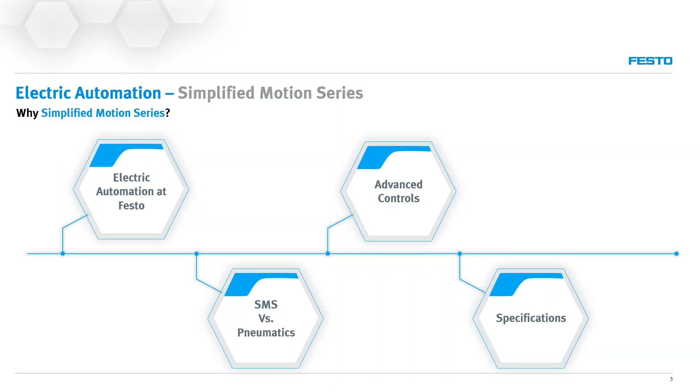Great stuff. I hope you guys got the gist of what we'll be looking at today, referred to as Simplified Motion Series. Now, before we continue with Simplified Motion Series, I'd like to kick off with a poll. Do you have problematic air at your workplace? So if you've got water in the lines, or perhaps inconsistent cylinders running because of fluctuating air pressures, please just answer the poll quickly with a simple yes or no. As soon as we're done there, we'll continue with the presentation.

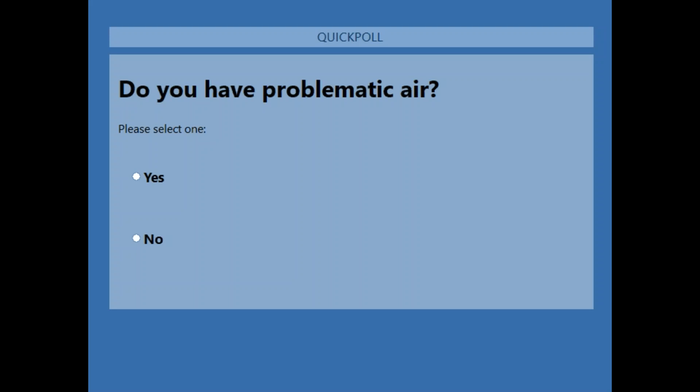Great. So guys, I believe you can see my screen again. And as you know, in electric automation at Festo, we've got quite a wide range of products in our portfolio. So where does Simplified Motion Series come into play?

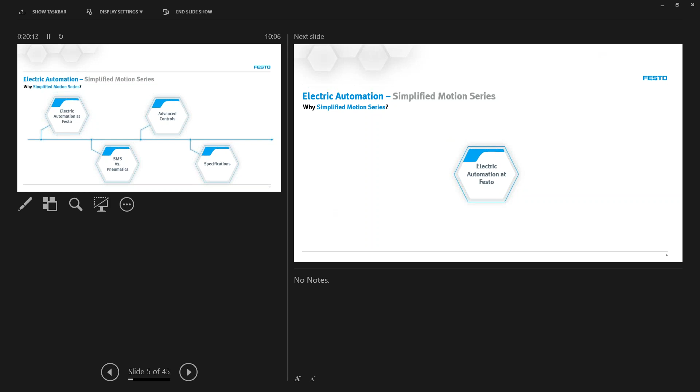So as you'll see with Simplified Motion Series, it really comes in at the bottom end.

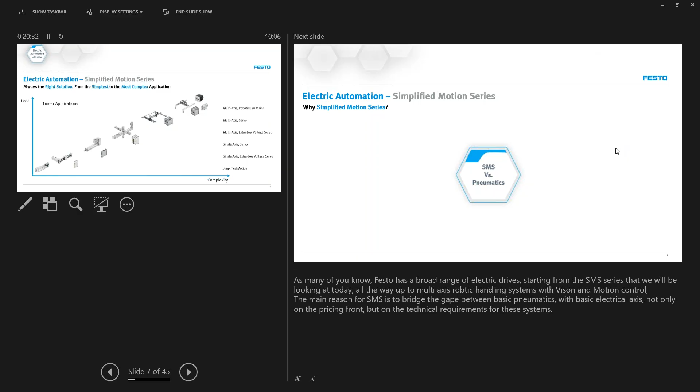Excuse me, Mark, it's just in presenter mode. Do apologize, I don't know why it's done that now. Thank you, Kirsha. As you see, the GoToWebinar is still a bit new to us, and if you click a bit on the wrong place, you tend to see wrong things. All right, guys, so I believe we can now see the full screen again. So

100%. All right, so as you can see in the bottom left-hand side, Simplified Motion Series is where we start, and it is the lower end of the cost versus complexity chain. And as you can see, we also progress up from single axis, be it extra low voltage servo, full servo axes, all the way up to the top where you have the multi-axis systems alongside motion controllers and of course our vision systems. But today we'll be focusing on Simplified Motion Series and what it brings.

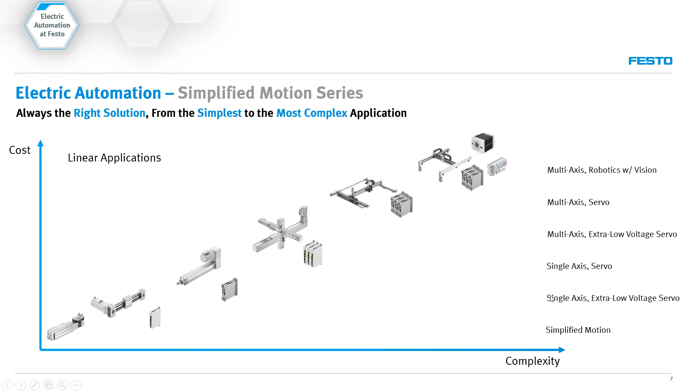So where does Simplified Motion Series fit in? We believe it actually is the bridge between standard pneumatics and electrical axes. So with that, let's have a quick squiz at how we compare the Simplified Motion Series to the pneumatics. So as you'll see in the bottom left-hand side is our Simplified Motion Series. And hopefully you'll notice that it is a mechanical axis, similar to that of a pneumatic cylinder, integrated with a decentralized, already attached stepper controller.

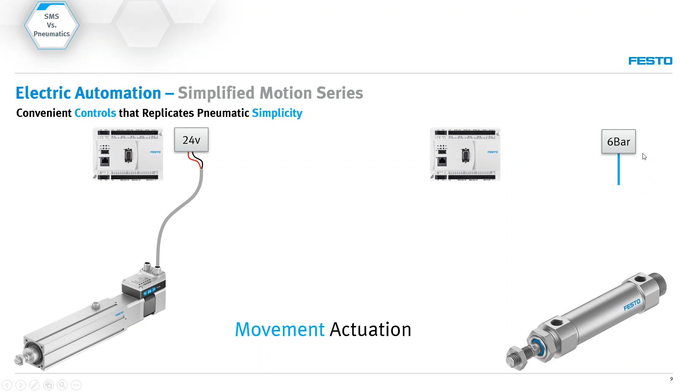So in today's day and age, to get motion or actuation, we need to look at how simplified motion or even pneumatics start in terms of actuation. So we both need some form of supply, be it electrical supply for the Simplified Motion Series being 24 volt, or if you compare pneumatics, you would of course require 6-bar pneumatic pressure. How do you then get movement? So movement is quite simple. You attach your inputs directly to the PLC, and you will then be able to move your Simplified Motion Series either forward or backwards, so extending or retracting.

How would we do that with a pneumatic cylinder? Quite simple. We add in a valve, and for today's exercise we're going to be using a 5/3-way center closed. And the reason we're using a 5/3 center closed is so that we can try and stop a pneumatic cylinder halfway. So we've got our 5/3 valve. Now we need to connect from the PLC exactly the same two outputs to the valve to switch to go positive or negative. So you guys will see that the outputs from the PLC are the exact same between the pneumatic and the electric option. So from the valve, we of course have to pipe up to our cylinder, and we'll now be able to have motion.

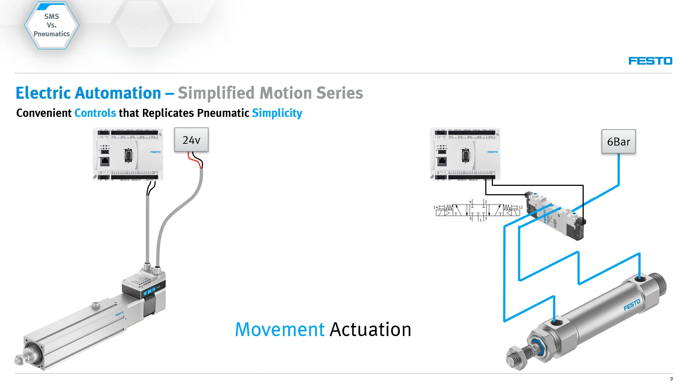So what do we need to do with that motion? We need to be able to control the speed. So for those of you that have worked with pneumatic systems, how do we control the speed? Quite simple. We just add in a couple of flow controls, and we can now adjust the speed by regulating the exhaust on those cylinders. So a question might come up: how do we then control the speed on a Simplified Motion Series? Quite simple. With the HMI on board, you'll see that we've got two speed settings, one for speed out and one for speed in, meaning the extending speed or the retracting speed.

Okay, so what else can we set on a pneumatic cylinder? Of course, we can set the force. And how would we set the force? By adding in a pressure regulator.

Sorry about that, throat getting a bit dry this morning.

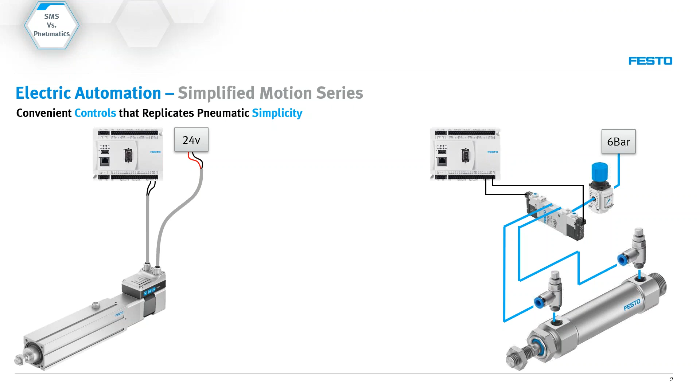All right, so by adjusting the pressure to the valves and to the pneumatic cylinder, we can control the actual force that the cylinder is applying. So once again, on Simplified Motion Series, we can adjust the force on the actual HMI. Then what else do we need? We need to be able to know or interlock whether the cylinder is retracted or extended. So by adding reed switches or limit switches onto your pneumatic cylinder, the PLC will be able to know where the cylinder is. In exactly the same way, we can pick up whether your Simplified Motion Series cylinder is extended or retracted, because of the encoder included in the stepper motor, we know the actual position. So we negate the need for additional sensors.

So that's two things that it'll actually assist the customer with. One, it reduces the purchase cost because you don't have to buy external sensors. And of course, you get rid of those niggly fingers, 11 o'clock, 12 o'clock at night, where machine operators move sensors so that the machine can stop operating.

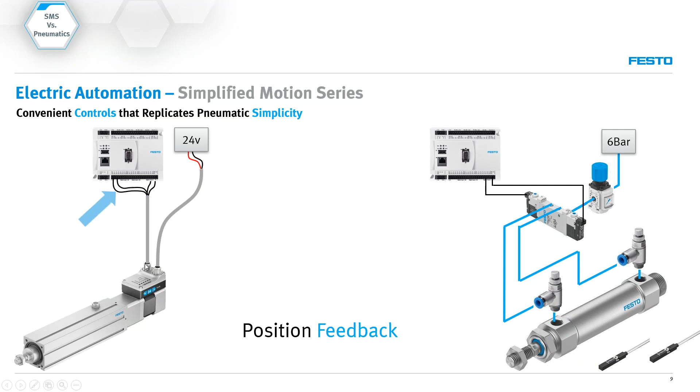So as you see, the sensors are wired directly into the PLC and are included in the same cable. For those of you that might have noticed, there are only two cables that get wired to the Simplified Motion Series, one being your source or your 24-volt supply, and the other plug gets wired with regards to your signals as well as your IO-Link. IO-Link has its benefits, and I'll touch on IO-Link a little later in this presentation so that we can see exactly where the benefits of the IO-Link system are.

So how do we control this? Digitally, it's controlled via two inputs. And we get the position feedback via the signals from the Simplified Motion Series. Further than that, there's no configuration or tuning needed.

Cassandra will be popping up a poll just to find out, do you have technical or qualified maintenance technicians on site, or do you make use of external contractors? So guys, if you can just give us a yes or no there, do you have qualified maintenance technicians on site? As soon as we're done with that, I'll answer as to why that's important with the Simplified Motion Series.

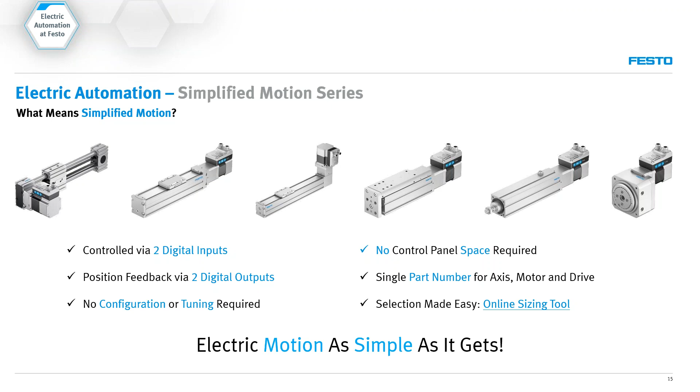So as you can see, it's electric motion, as simple as it gets. But let's compare again between electric axis and pneumatic axis. What is needed and what are the benefits that we get?

So of course, electrical axis, because of the closed loop control, we get repeatability, we get accuracy of about 0.1 millimeters, where with a pneumatic cylinder, your speed as well as your force and pressures all vary because of temperature and loading, as well as load on the compressor system. So if you want accuracy and repeatability, electric axis is the way to go.

We also look at installation. You see on the Simplified Motion Series, you only need one component, where on the pneumatic, you need 7 odd components. So as I mentioned, from your store having to order, as well as just keeping critical spares in stock, you can use one system.

Imagine OEM here has 3 of the same cylinders, one being 100 millimeters, 125, and let's say 155 millimeter. He's got a custom cylinder. He now has to keep 3 cylinders in stock. With the Simplified Motion Series, he only has 1 in stock, and because he can adjust the stroke, he then reduces the stock requirement.

Of course, we also look at the smoothness of motion. You'll see in the demonstration how slow we can operate the Simplified Motion Series. And for those of you that have worked with pneumatic cylinders, we all know that once you set a pneumatic cylinder to a very slow speed, we get what we refer to as stick slip, where you start getting a jerk motion. And of course, that's not good for a cylinder. As well as being able to control loads at high speeds, you want something that controls it, and that's where Simplified Motion Series comes in.

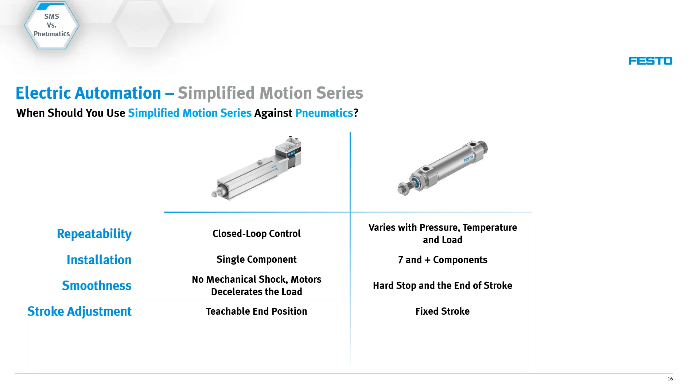We often hear a lot of the customers out there ask what it is in terms of the running cost, which is cheaper or more cost effective to run, electrics or pneumatics, and each application is based on its own merit. However, if you look in general, with highly efficient electric actuation, there's no losses in terms of leaks or maintenance on a compressor or maintenance in the air preparation unit. So cost of operation is, of course, therefore a lot more cost effective.

Another important point to take into account is the safety. If you look at safety nowadays, once you hit emergency stop, with an electric axis, we stop, we immediately disable, there's no more force being applied. With a pneumatic system, unless you've got quite an expensive dump valve system in, there's always residual pressure on the pneumatic cylinder. So therefore, the potential for injury still remains.

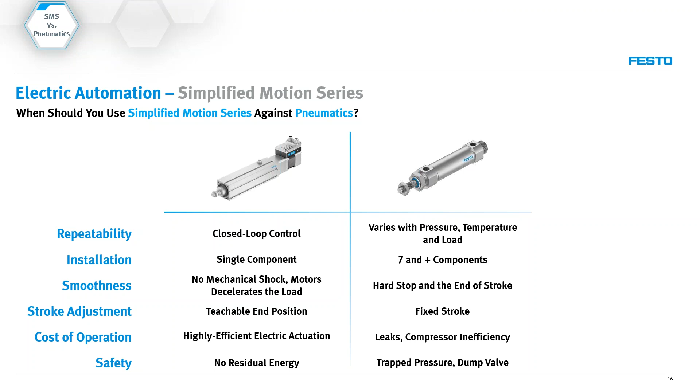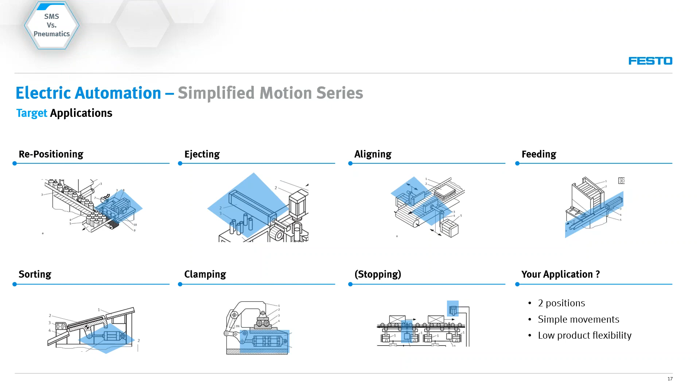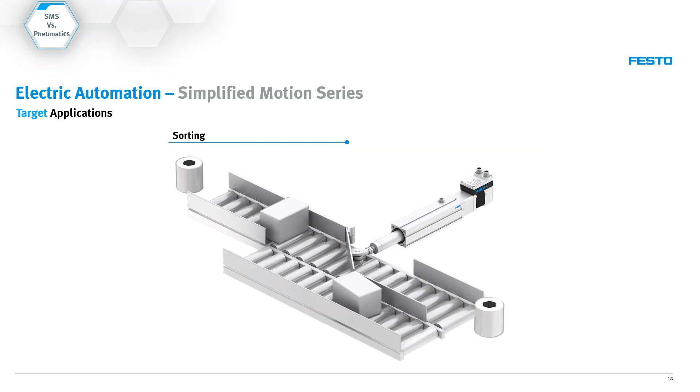So guys, if you can just let me know if you can see the screen in terms of sorting. It's an interactive video that's playing.

All right, so we also look at positioning, where positioning is perhaps one of the most commonly used applications.

So I just need to check. Kershaw, are you guys seeing what I'm seeing there, or are you still on the topics page? Yes, I can. I can see the video. Okay, 100% just checking. Sorry for my update on my side.

All right, so positioning, we have an application where a customer has perhaps 2 or 3 SKUs or different products that he's running, and he needs to align it under either a labeler or a printer or perhaps a camera scanner. And with the flexibility of the electric axis, you can of course adjust the position by just changing the end position. You can align each product differently.

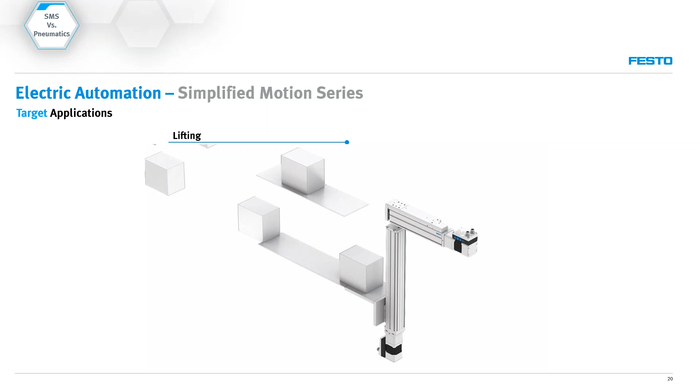We also look at perhaps a lifting application where customers have stacking applications or lift and transfer, and that of course changes with each product. So needing to perhaps change your stroke for flexibility, that's where the flexibility of the electrical axis really comes into play.

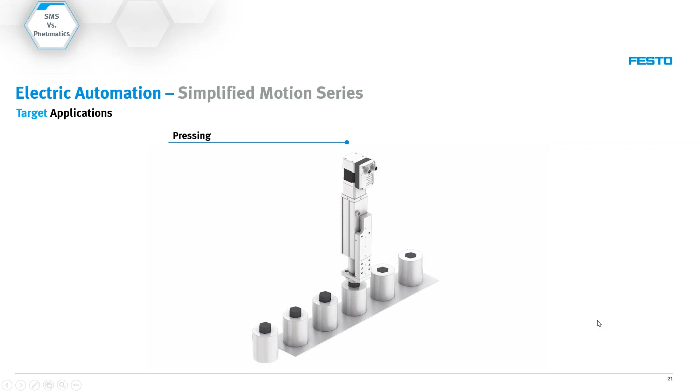Then one of the nice interesting topics I want to show is the simple pressing application. So when we refer to a simple press application, what does it really mean? It means that the axis can actually move towards the product at a high speed, just before it reaches the product slow down, and then go into what we refer to as a force mode. And that force mode is done at a slow speed, but of course to a force set point. And once your axis reaches the force set point, it will stop and give you a corresponding output to say, I've now reached my position and force.

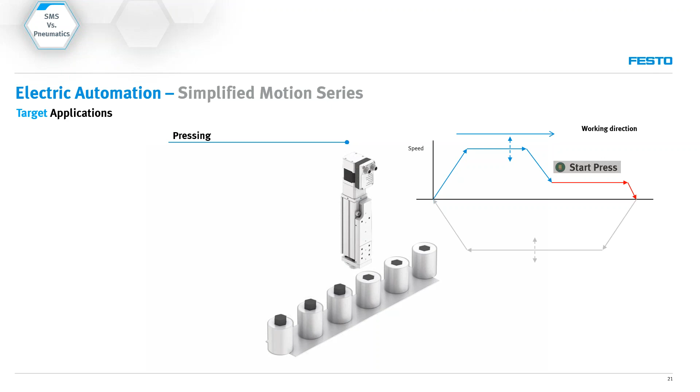So you'll see some of the applications that we have represented here, for instance, on small turntables, we've got pushers that's moving it. We even have electrical stoppers on a conveyor, which negate you having to run separate pneumatic piping for that. You can also, of course, lift and lower your cameras depending on the application or the product running through. So you'll see that Simplified Motion Series is an easy unit to use everywhere in the factory.

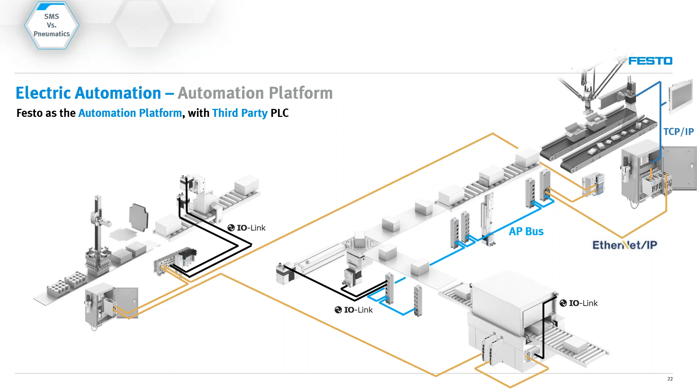And of course, looking at simplifying things, how do we simplify the installation? So if we look at an IO-Link type of installation, you can now see we can have a lot more advanced installations and advanced controls. So in this picture, you'll see that we're using our remote I/O, the CPX-AP-I, which there will be another webinar on. So please keep a lookout for that.

You'll see that we've got 12 of our Simplified Motion Series axes connected to an IO-Link network. What does that mean for you as a customer? It means by running one single cable back towards the PLC or the control room, you can connect up to 12, if not more, of these Simplified Motion Series. That also gives you a lot more information, and that's where I'm going to be touching base with IO-Link in terms of why IO-Link over digital control. But to take us a little bit further, let's go and have a look at those advanced controls. What are they really?

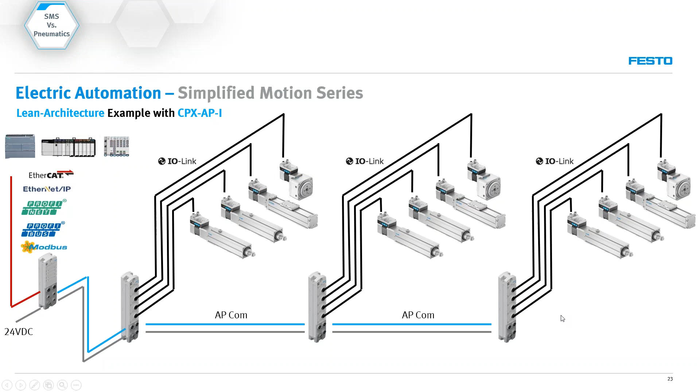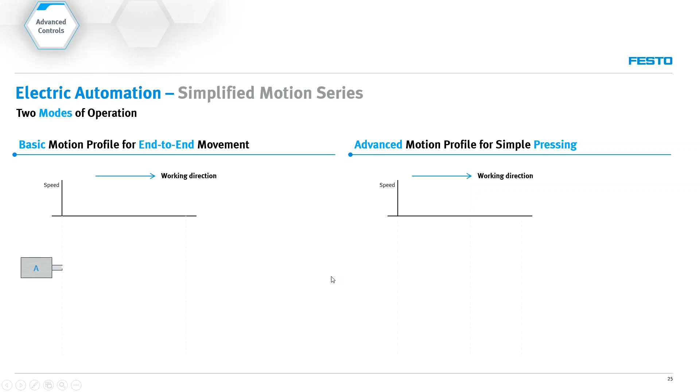All right, so in the beginning, we showed you exactly what the cylinders can do in terms of movement. But here we've got a graphic representation of how these systems work. So Simplified Motion Series is based on having two positions. It's got a fixed in position or its home position, as well as its reference position or its start press position. I will, in a hands-on tutorial, show you exactly how to set everything up. So stay tuned, because I believe once you see how simple it is, you won't look at electrical axes the same again. Then for simple pressing, you have the same parameters where you can set your stroke, the speed at which it gets to that position, and then of course the force.

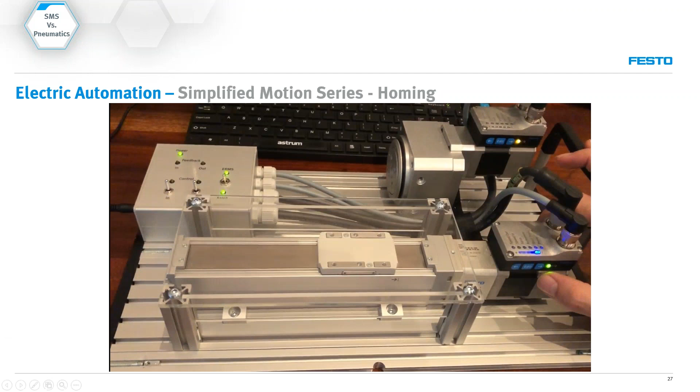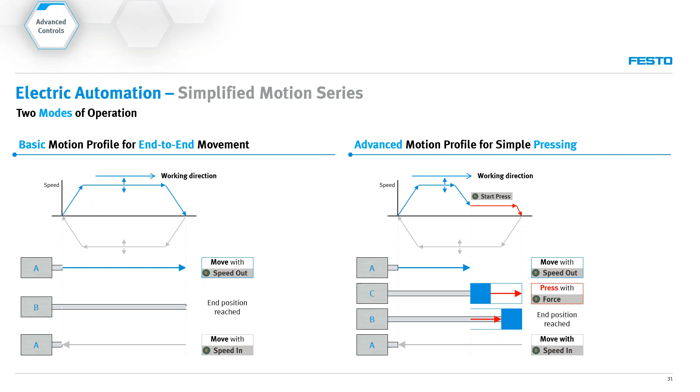All right, guys, so all of the settings were done on the onboard HMI. So just to explain what those half bright LEDs refer to: you can set either the speed or the force as a percentage, from 10% in stages of 10% all the way up to 100. So you would go 10, 20. So a half lit LED is 10%, a full lit LED is 20%. So that's how you can adjust that.

So now let me just give you the last video to show you exactly how the start press works. But before we do that, let me actually explain how it works. So once the signal is received by the Simplified Motion Series, the axis will move forward until it reaches the start press position. Once it reaches that position, it changes its control and goes into a force mode. It will then move forward at a slow speed until it reaches the force set point.

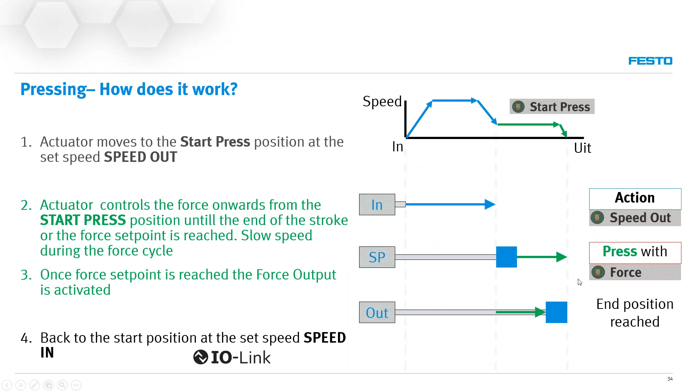Once it reaches the force set point, you'll get a corresponding output on the same outputs as you saw earlier in the presentation, and therefore you can have your interlock. Once you've reached your force, you can of course then move it backwards, and then you'll be back in the home position. But let's have a look at how that's done physically, because that's the only one that takes a button twice.

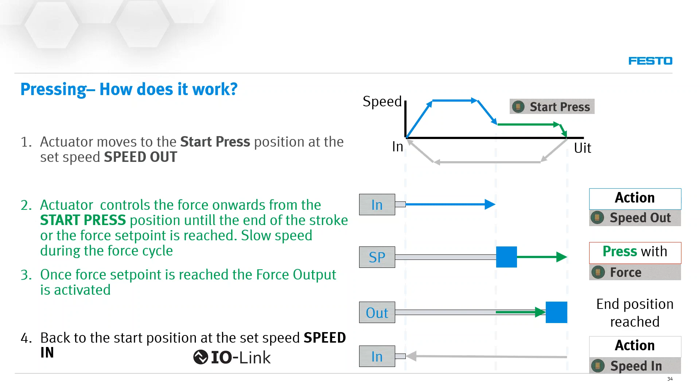All right, so guys, I've been wondering why it's so quiet, and apparently you've been muted. So, Kirsch, if you don't mind unmuting the crowd there, are there any questions so far from everybody out there? Unmuted. Has there been any questions in the chat so far? Marcus, there's a question. Can you buy the motor separately?

All right, so the motor can only be bought separately as a spare part for an existing axis. Once you've purchased an axis, it comes with a motor and controller in one. If you want a spare motor, you need the configuration part number, and it will then give you that as an option.

So with the mics unmuted, guys, just make sure that you mute yourself unless you're asking a question, because I can hear some background noise coming through. So hopefully that answered that question with regards to the motor by itself. Any other questions, guys? Unmute, ask away. I promise I don't bite. Okay, so no questions thus far. Muted. Unmuted. Hi, Marcus. Hello? There we go. Sorry, I was muted there. Yes. All right, great. Okay, so there is an application here as well? All right, so the application, we're going to touch base on the sizing, so please keep record of that, and when we do the sizing, I'll touch base on that one.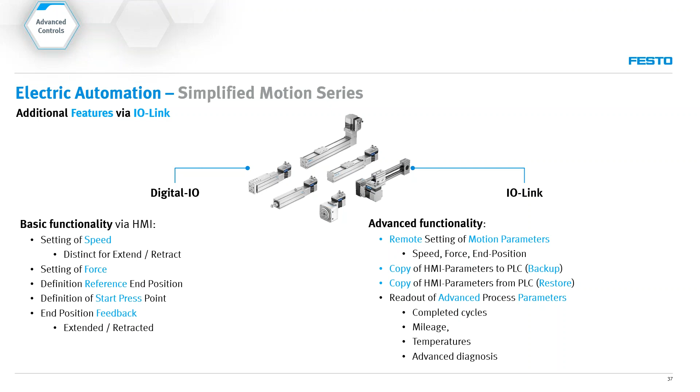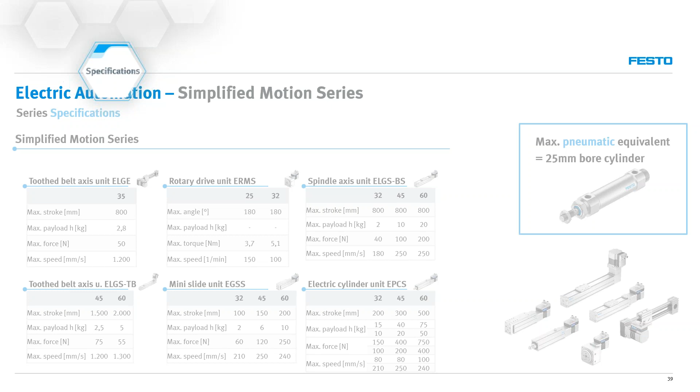So in the process of comparing, let's have a look at the specifications of these units. We mentioned that they are on the smaller scale, so it's not meant for your 1.7 ton type systems. It is designed for the smaller. So you'll see that, for instance, on our tooth belts, let me get my laser over there.

Luckily, I don't have any cats running after the screen now.

So you'll see on our tooth belt units, you can go up to a 2 meter axis. And on the cylinder style, you can get up to about a 750 Newton feed force. So of course, it does equate to roughly about a 25 bore cylinder. So once again, guys, simple positioning, two position, small, where you need a lot more control on your pneumatic cylinders.

And with that being said, yes. There's a question here. Can it only be set up by the onboard controller? All right, so the onboard controller is where you can set the parameters, or if you connect it via IO-Link, you can set up the parameters via IO-Link. You do not need any external software or laptops to set it up. So those are your two options: via IO-Link or via the onboard HMI. Okay, so you don't need external controllers.

Another question is, do you need a PLC to run the system? All right, so the same as a pneumatic cylinder, you can have push buttons or selector switches to do manual change. So let's say, for instance, a machine has a changeover between two products, and you can have a selector switch to have it running either extended or retracted.

So you can do it with pure digital, but in today's day and age, I think every machine either has a PLC or some form of relay logic. So you don't need a PLC, you can use selector switches, but I would use a PLC, and of course Festo has a brilliant range of PLCs from entry level to motion controllers.

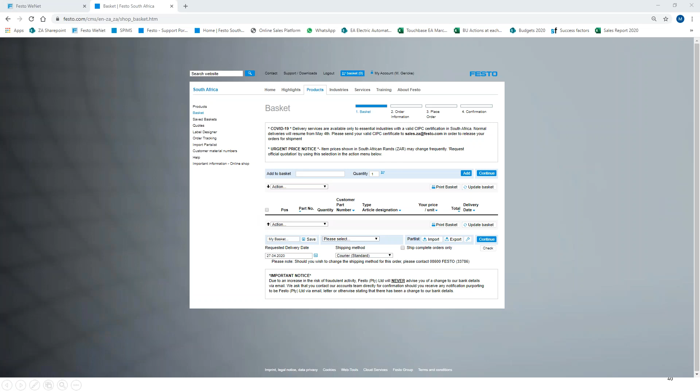Please, Cassandra, give me a shout and let me know you can see the web page. I believe so. Yes, we can. And while you're on there, there was an application that somebody mentioned. Have you got any information on that? Okay. Actually, I have two questions. Can I just ask one of them before we get to the application? 100%.

Okay. Do you have this in an ATEX version?

Unfortunately, this is not ATEX approved. Okay. So the application is for a stacking application? Okay, so before we do that, all right, so you can see on the page, you basically can select, of course, a stroke and a payload. You can select whether it's linear or rotary. If you select rotary, you'll immediately see that it will give you only rotary options.

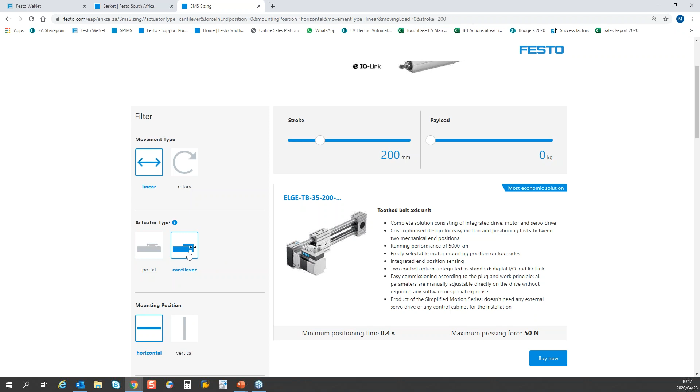So you said a stacker, so we'll keep it as linear. And then a stacker would not necessarily be a belt drive like that. I would go for a cantilever style, which is, of course, just the cylinder where your cylinder stays stationary and you have a rod come out. Now you'll see with the cantilever style, we only have the guided unit at this point in time because the cylinder is only being released in the middle of May. So we'll be using this one.

And then for a stacker, of course, we're not horizontal, we're vertical, and that's it. That's all you need to set for the stacker. So have you got a stroke length there, Cassandra? Yes, it's 150 millimeters. 150, and then of course a payload or a mass that we're picking up. 5 kilograms. 5 kilos, nice and lightweight.

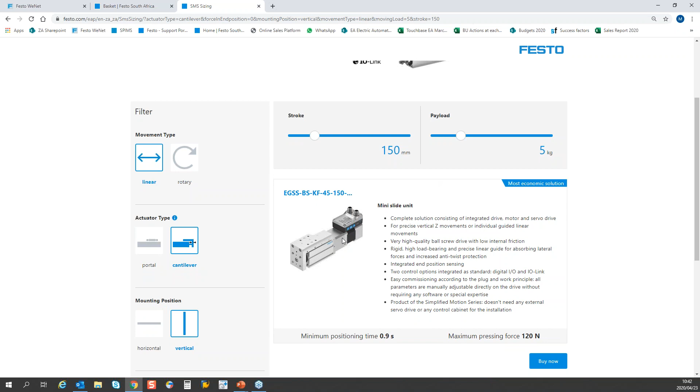All right, so with the 5 kilos, the system is giving you two solutions. You'll see a KF, the size 45, and of course the size 60. So if we select the 45, it'll tell us that there's a minimum positioning of 0.9 seconds with a maximum force of 120 Newton. And that's it. All you need to do now is click the Buy Now button.

It will give you a warning to say that the size and stroke may not be changed, which is fine. We're happy with the stroke. We've determined that. It will now open it on the online configurator. The only other thing that you have to now select is the type of communication or the bus protocol. So you've got two options. You've got an NPN with IO-Link or PNP with IO-Link. So we're going to go for PNP. That's our standard that we run on our PLCs just for today.

And you'll see it will give you the option to add it to your basket. From here, you'll be able to download your technical data, documentation, and of course, your EPLAN drawing. So you can then already download your 3D model and pull that into your application. So from there, all you need to do is add it to your basket. And I've already got my basket open. So it's added. Let's go to my basket. And we just say update. And done. It's already been put into my basket.

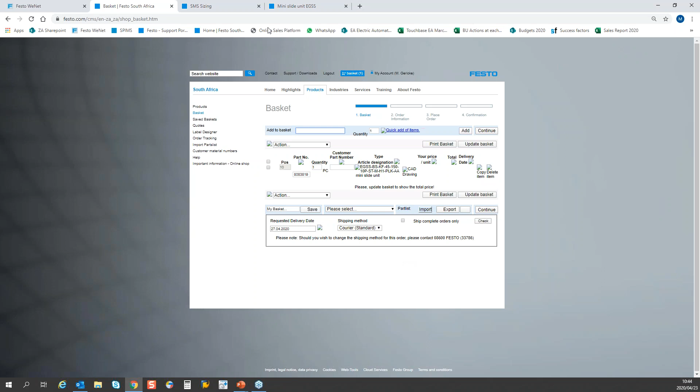Because I'm in presenter mode, it won't allow me to display all of that personalized information. So guys, that's the sizing in a nutshell. So let's go back to the presentation, and then we have a quick look at cost comparison, because at the end of the day, that is on a lot of people's tongue.

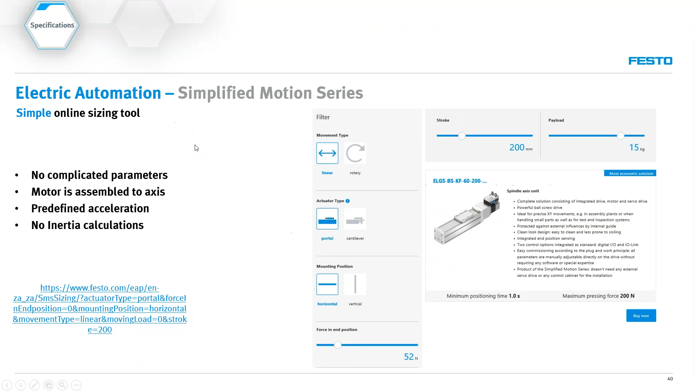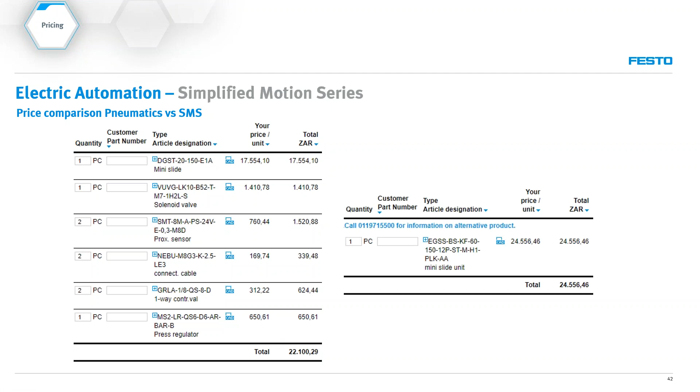So if you guys remember that list price about 24, there's about a 10% difference. But unfortunately, that 10% is now on the pneumatic saving. So for 10%, what do you get for the additional 10%? We now get consistency, we get repeatability, we get ease of maintenance. We also get diagnostics to give you guys advanced warning for preventative maintenance or predictive maintenance, what a pneumatic cylinder can't give. So I think for 10%, what's that, roughly 2,000 Rand, I get so many more benefits. So of course, there are things to look at other than just rands and cents.

So, question guys, here. Yes.

Can you adjust the position of the advance and retract on the SMS? All right, so the one position you can set is the advanced position. It's a bit difficult to explain, but let's say, for instance, you have a retracted position as the home. You can only set the end position. The retracted position will always be as retracted as it can be, so you can only adjust the end position.

If you invert it where the home position is the extended side, then you can set the retracted position as the end position, but you can only set one of the two positions, and you cannot set that on the fly. It has to be set and then run. So it's not for multiple positions, which is a good topic because that brings us to our next one. Cassandra, if you can launch the poll for us: do you require flexibility of your pneumatic systems?

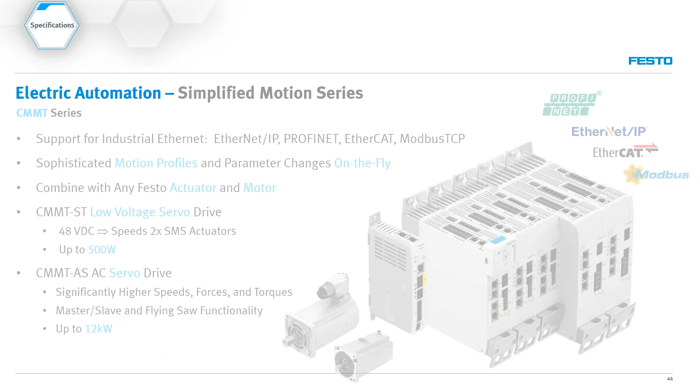Do you require more force? Do you require more stroke, speed, connectivity, or perhaps multiple positions? Is the Simplified Motion Series just not enough for you? Well, if you've answered yes to any one of those, remember that from a Festo perspective, we have a full range of servo drives, connecting into any third-party PLC. So if you've got a Siemens, a Beckhoff, or Allen Bradley, Rockwell, our drives integrate.

So from there, we've got our advanced servo drives, which are the centralized versions. We have our extra low voltage servo controller, which is also known as a stepper controller, and a full range of servo motors and stepper motors. So remember, if you need more than just the 2 positions that the Simplified Motion Series gives, we have a full product range.

So ladies and gents, that's me in terms of the Simplified Motion Series. I hope that was of interest to you and you have ideas or applications that you'd like to have a look at.

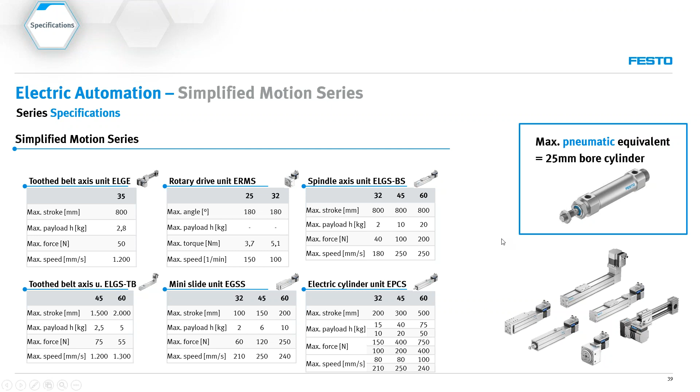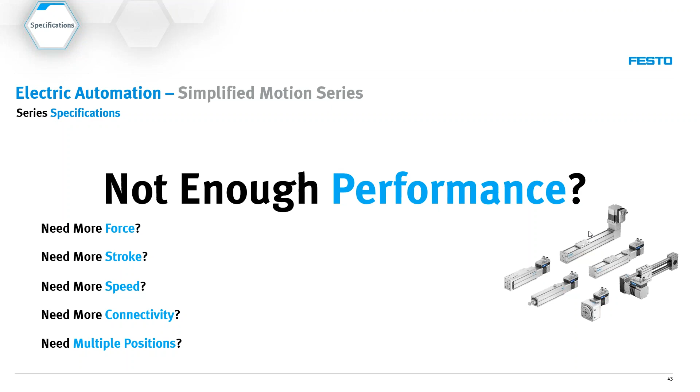Yes, a question here from Robbie, and he says, how does the SMS unit handle shock loads? So with regards to the shock load, it depends if you're a belt drive or a ball screw. So firstly, your mechanical impact. So the motor would, of course, take some of that loading. It will go in the negative direction, then of course move back in the forward direction. So the motor will reduce mechanical wear and tear on the axis itself, on the belt.

However, you need to look at the amount of shock versus the maximum force rating of the unit, but it can handle the shock loading of that. Exactly like a pneumatic cylinder, where the external force is greater than the internal force, it will retract a bit and then of course move back out once the load has been absorbed.